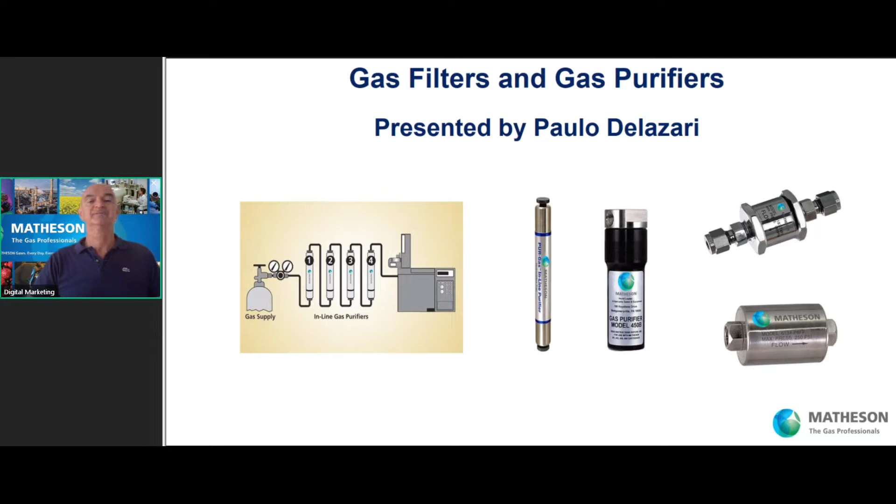What we'll accomplish today: we're going to learn about Matheson inline gas purifiers. We're going to learn about Matheson gas filters. And above all, we're going to learn that adding a purifier or filter is a good insurance policy from your gas source to the point of use.

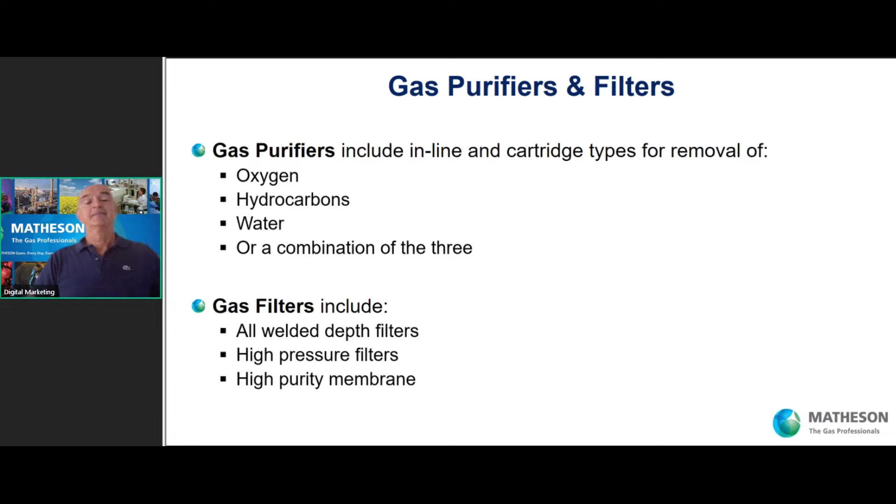Gas purifiers include the inline and cartridge types for removal of oxygen, hydrocarbons, water, or a combination of the three. Gas filters include all-welded depth type filters, high-pressure filters, high-purity membrane. Purifiers are used to remove specific chemical components from a gas stream by catalytic action, by adsorption. They include inline and cartridge types for removal of oxygen, hydrocarbons, water, or a combination as mentioned before.

There are several types of purifiers. Expendable: when they're saturated, they must be replaced. Regenerable: they can be reactivated. As a note, purifiers are not rated to be filters, which function differently, and we'll talk about that during this presentation.

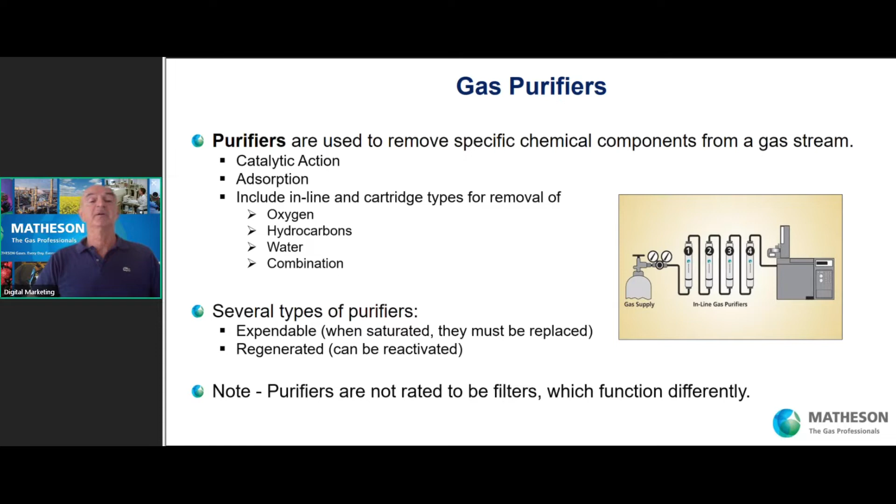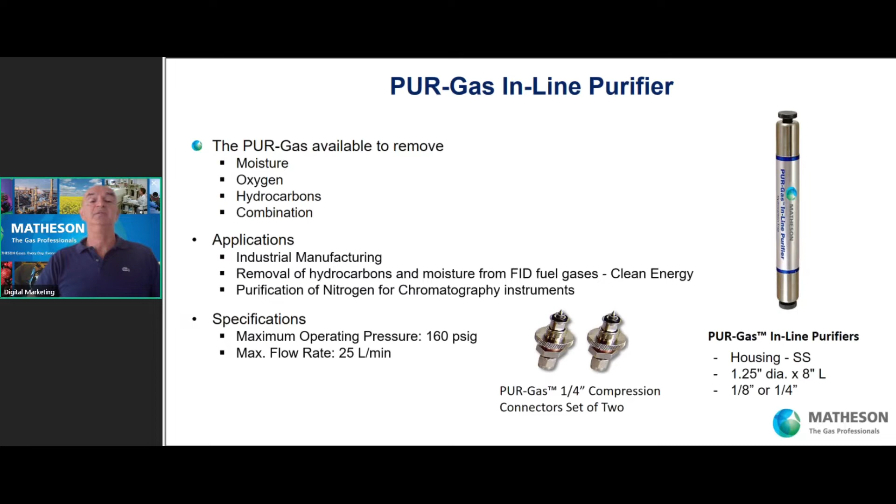Applications: we use a lot of these inline purifiers in industrial manufacturing, the removal of hydrocarbon and moisture from FID fuel gases such as clean energy, purification of nitrogen for chromatography instruments. Key specification parameters: the maximum operating pressure for the PUR-Gas inline purifier is about 160 psig. The maximum flow rate is 25 liters per minute. And the outlet purity is 6 nines.

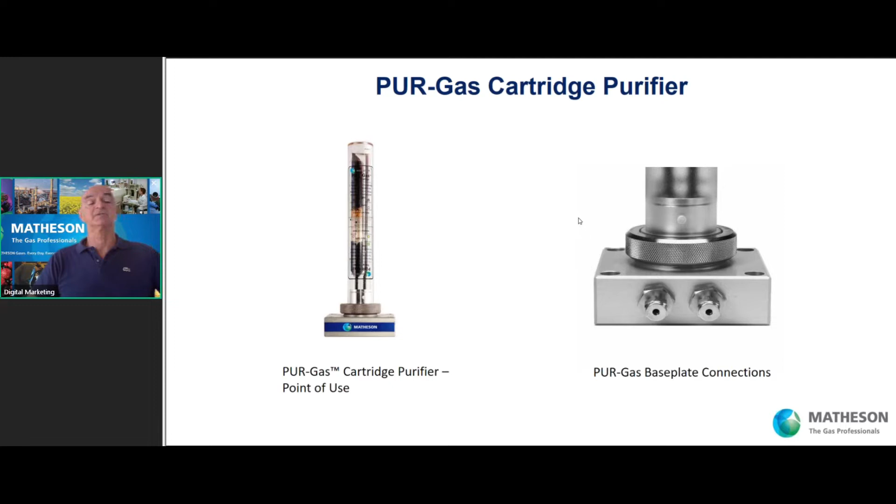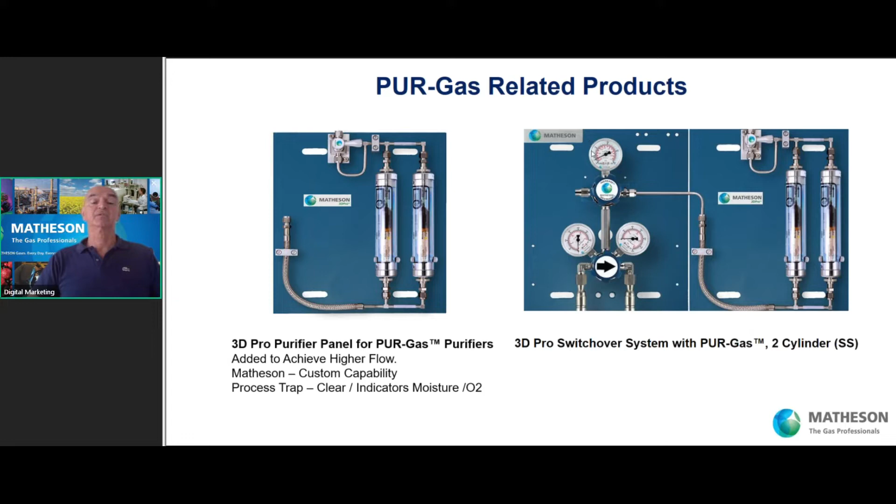Key specifications are: the maximum operating pressure is 2000 psig, maximum oxygen operating pressure is 500. Water removal capacity: the 451 is 5.4 grams. The 452 is 6 grams.

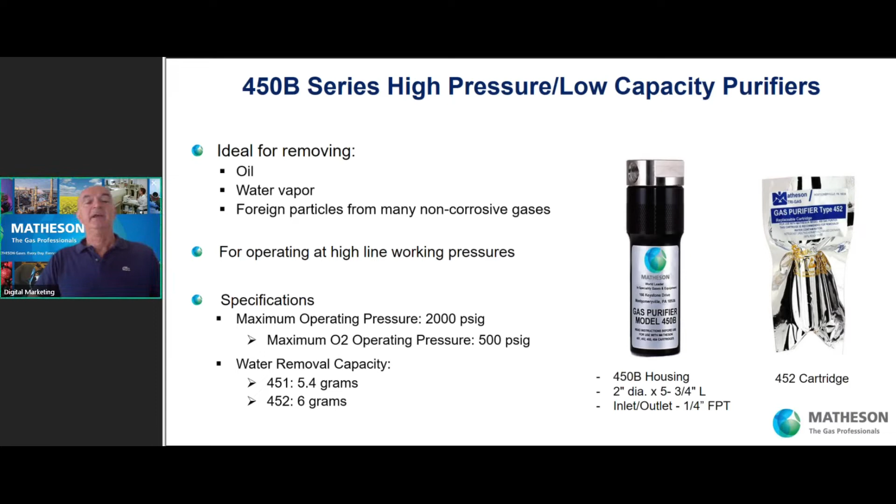Key specification parameters: maximum operating pressure is 350 psig, maximum flow rate 10 standard cubic feet per minute for short periods, less than 15 minutes, 1 to 3 standard cubic feet per minute for extended use. Water removal capacity: the 461 is 134 grams. The 462 is 126 grams.

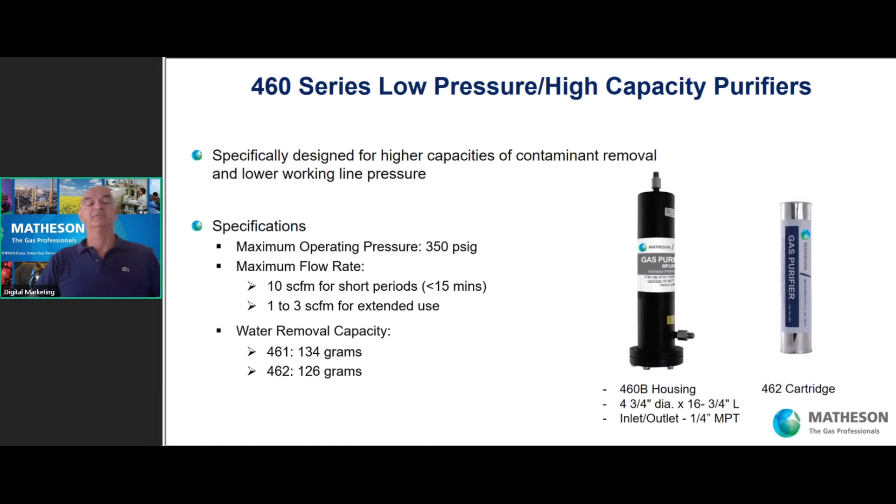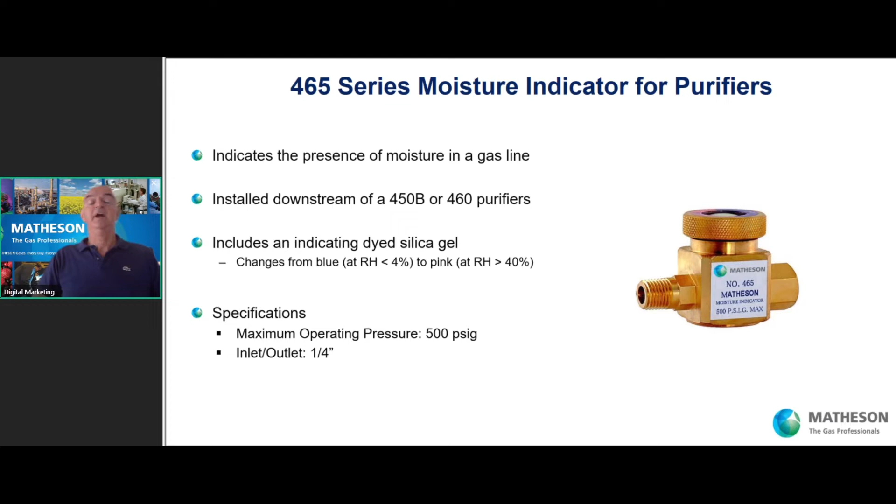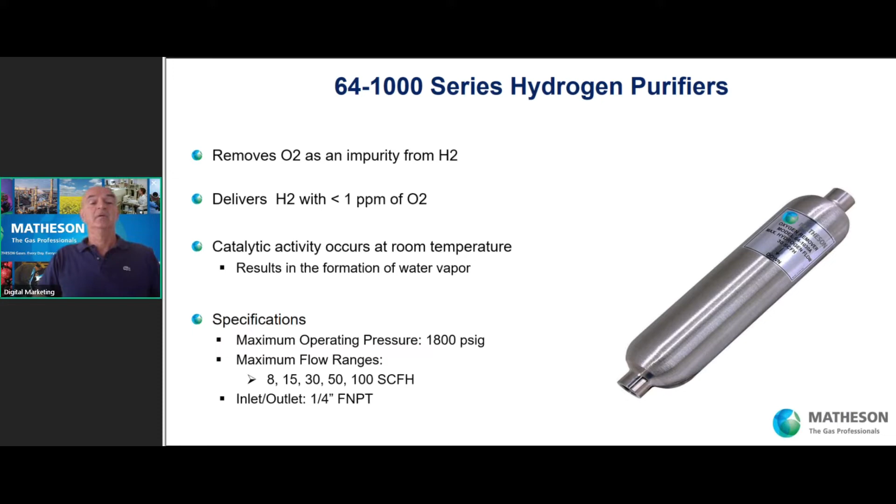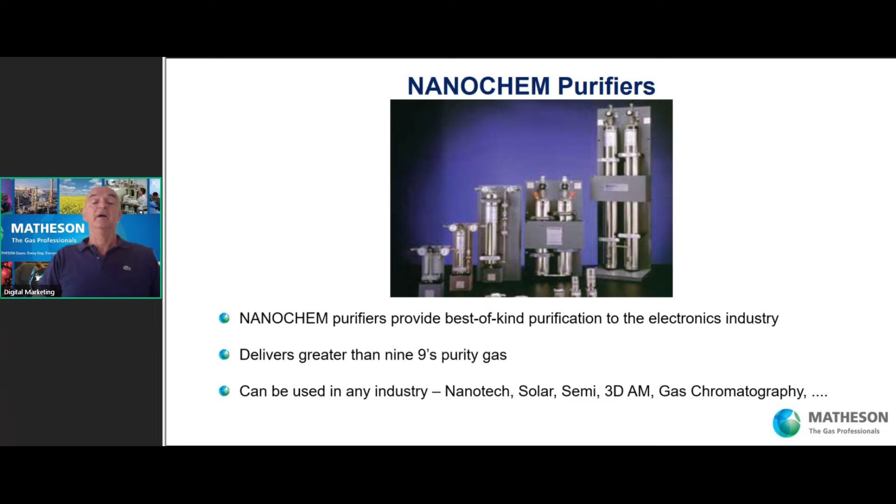Additional purifiers, the NANOCHEM, which we'll be talking about in a different series of webinars, are available. Briefly, NANOCHEM purifiers provide best-of-a-kind purification to the electronics industry. It delivers greater than 9 nines purity of gas and can be used in any industry: nanotech, solar, semiconductor, 3D additive, gas chromatography, and others. Here's a sample of some of the NANOCHEM purifiers.

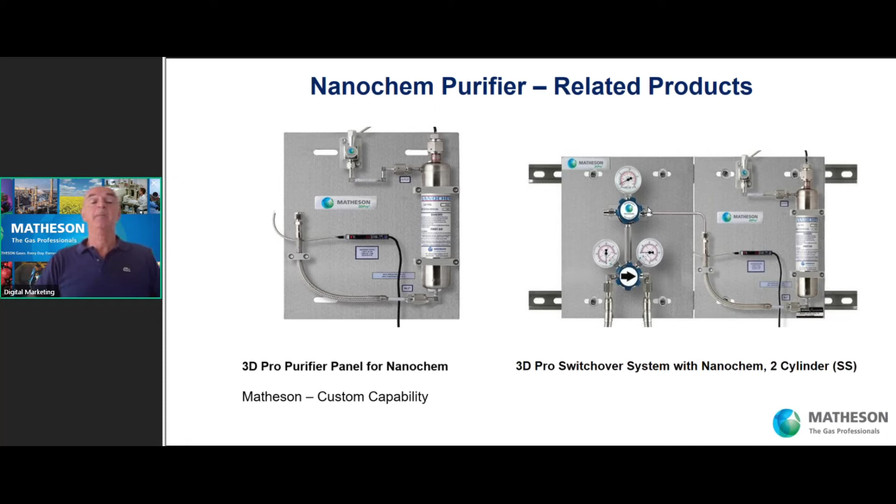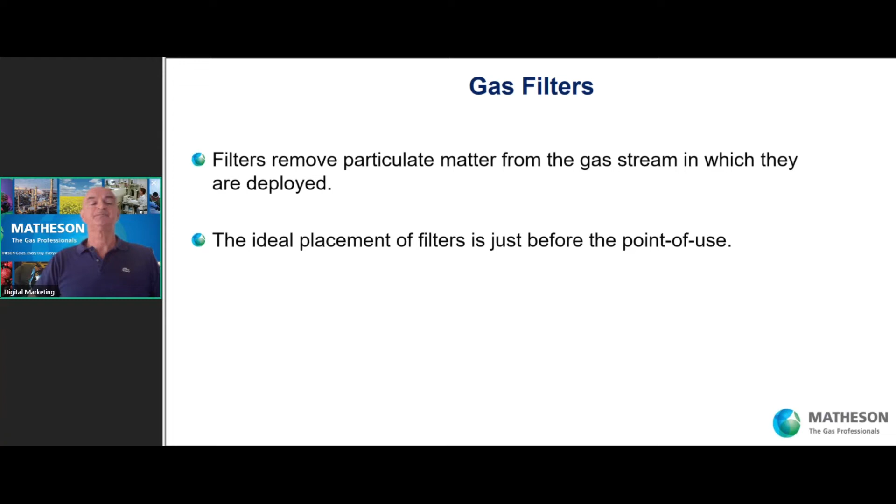Let's go into gas filters. Filters remove particulate matter from the gas stream in which they are deployed. The ideal placement of filters is just before the point of use. Applications: energy, fuel cells, labs, and laser applications, in addition to others.

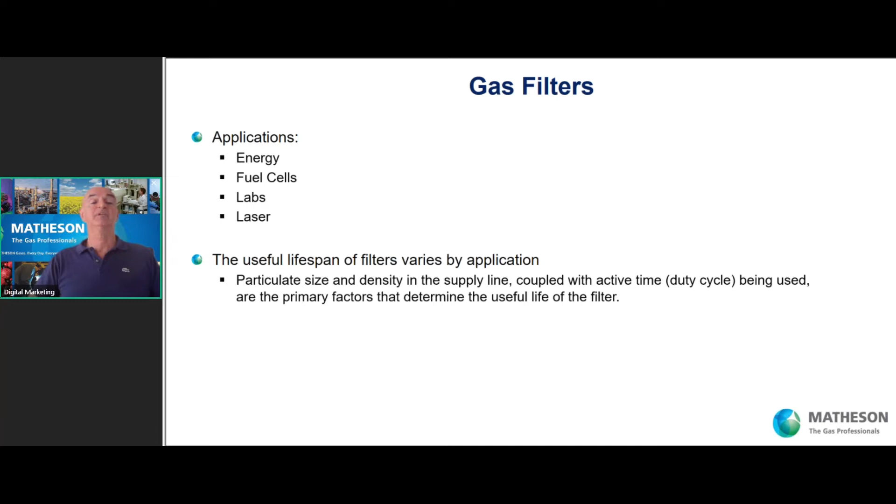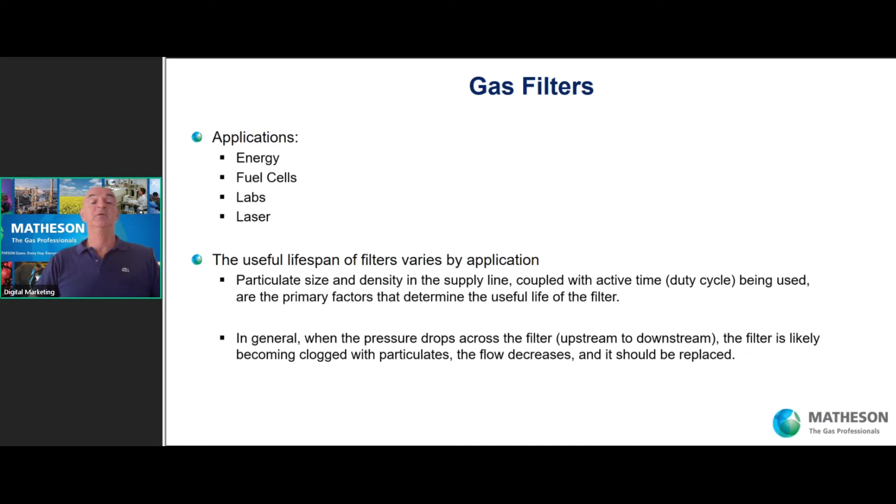The useful lifespan of filters varies by application. Particle size and density in the supply line, coupled with the active time, duty cycle, are the primary factors that determine the useful life of the filter. In general, when the pressure drops across the filter from upstream to downstream, the filter is likely becoming clogged with particulates. The flow decreases and it should be replaced.

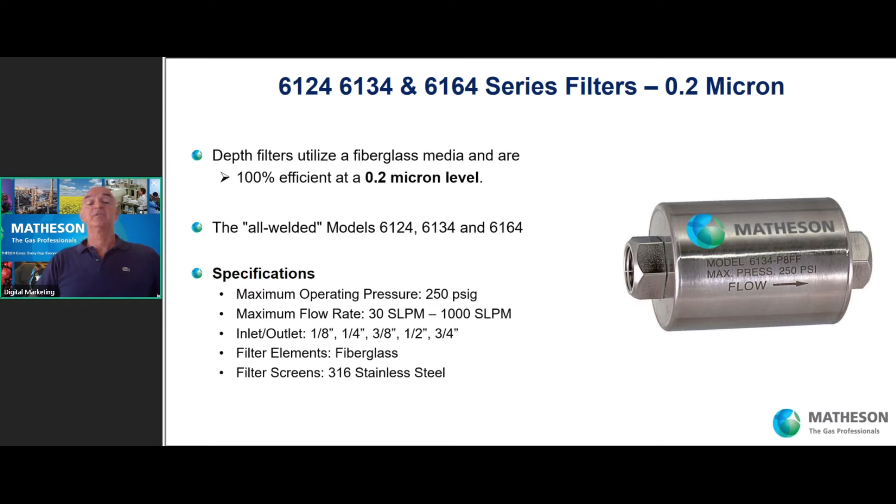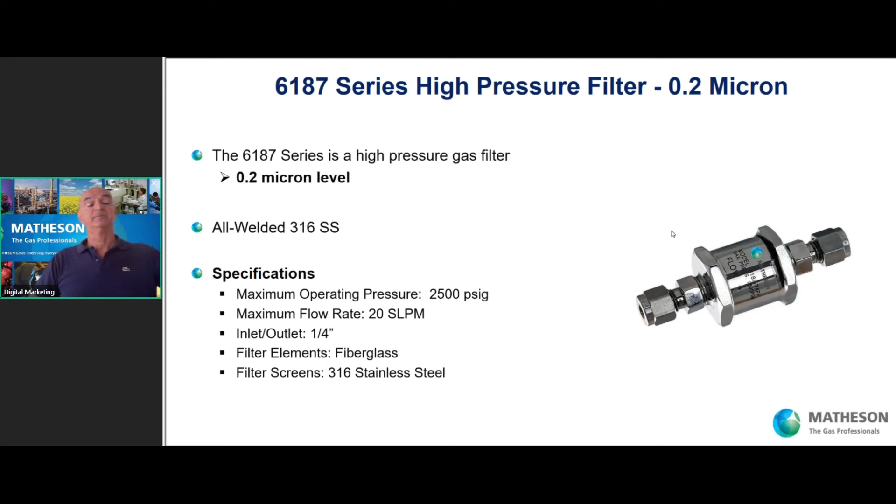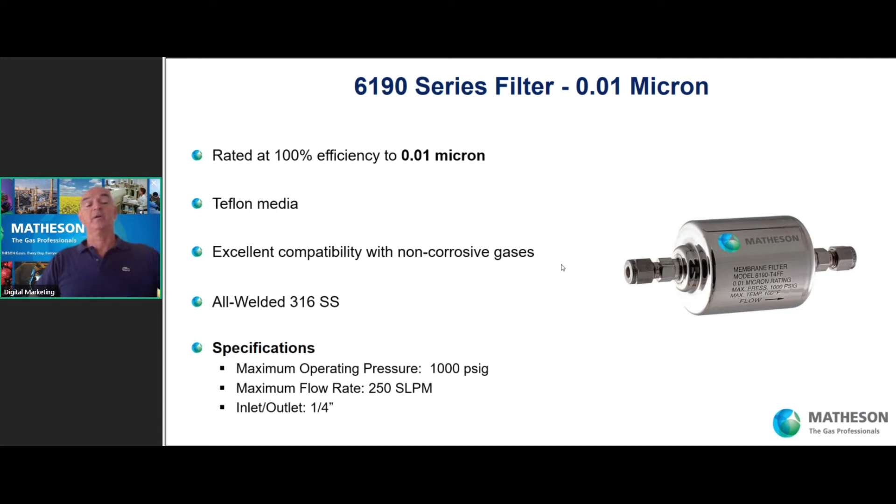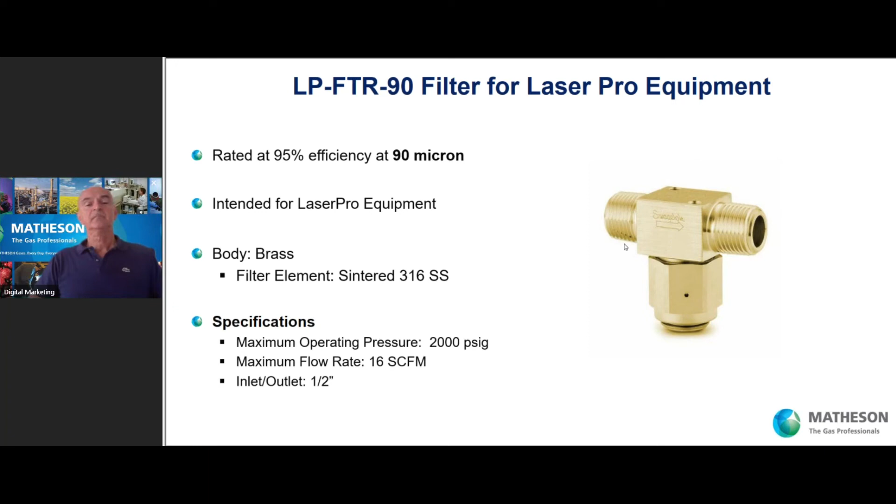One helpful resource for all the products that we discussed today that are available at Matheson is at store.mathesongas.com. It's a helpful resource that has all our products, all our data sheets, and you can configure and get a price or buy the product in there. Just to give you a look at this at the store Matheson Gas.

So I strongly mention that you should go into this, our de facto catalog from Matheson right now, store.mathesongas.com.

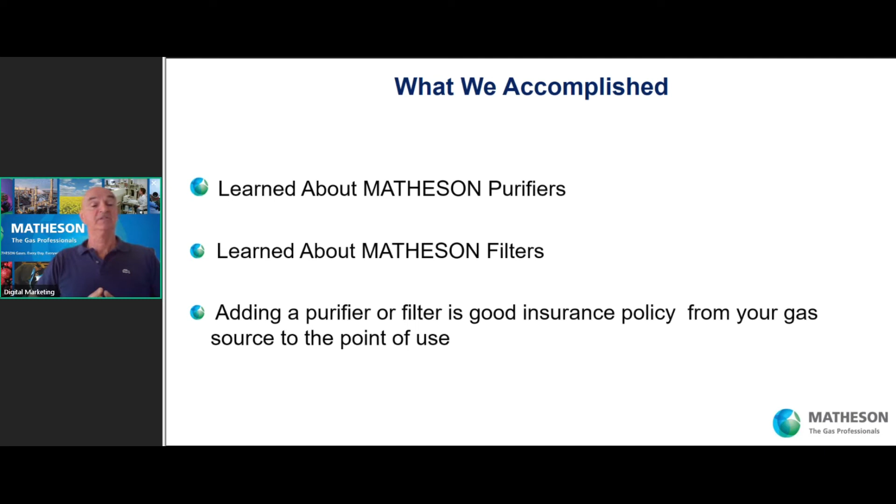What have we accomplished today in this short brief GoToWebinar presentation? We learned about some of the Matheson gas purifiers. We learned about Matheson filters. And we learned that adding a purifier or a filter is a very good insurance policy from your gas source to the point of use.

We have received some questions in advance for filters and purifiers. And we'll have our engineering manager, Bill Staples, answer some of the questions that were submitted to us.